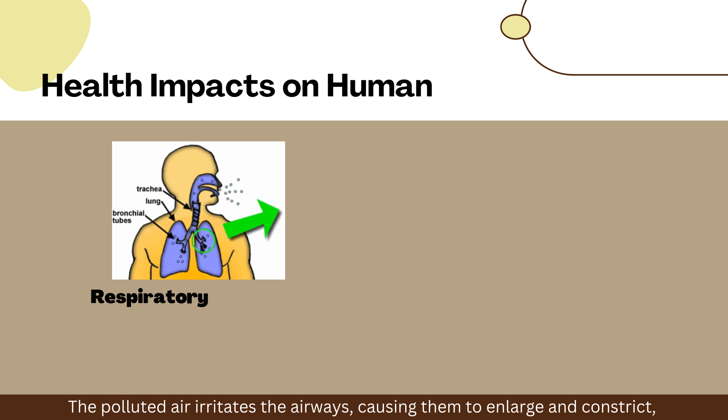However, based on Fadil et al., air pollution from oil and gas production contributes to thousands of early deaths and childhood asthma cases nationwide. The pollutants released and emitted can cause health problems. The polluted air will irritate the airways, causing them to enlarge and constrict, resulting in breathing issues, particularly in children with asthma. Aside from that, contaminated air can cause cancer since it includes a combination of contaminating particles.

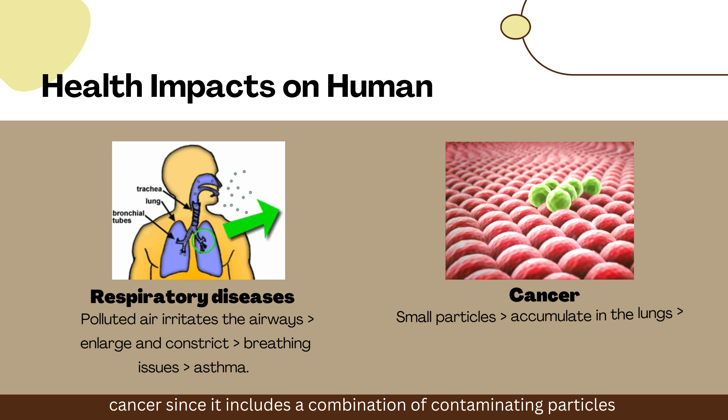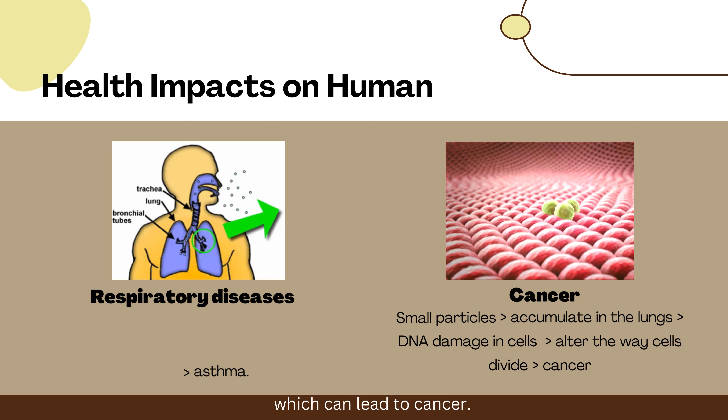There are several ways in which air pollution can induce lung cancer. For example, small particles may accumulate in the lungs and cause DNA damage in cells. This can alter the way cells divide, which can lead to cancer. Photochemical smog, acid rain, greenhouse effect and global warming, ozone layer depletion, and other effects of air pollution emissions into the environment might have long or short-term consequences.

Air pollution can be regulated by relevant laws. Each nation has its own legislation, such as the Environmental Quality Act 1974 in Malaysia, the National Environmental Management Act in South Africa, and the Canadian Environment Protection Act of 1999.

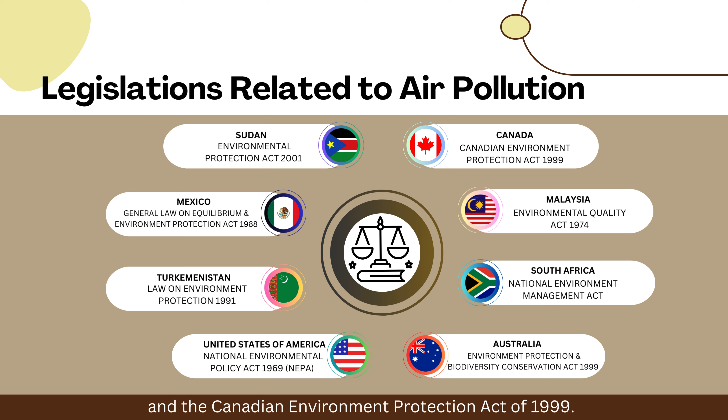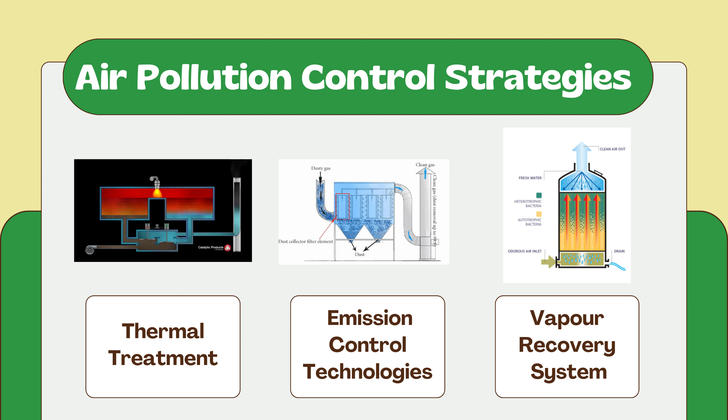The pollution caused by industrial activities is subject to mitigation and control strategies. Nowadays, there are various air pollution control strategies being applied in the oil and gas industries to reduce the risk to air and create more ecologically friendly plants. Thermal treatment, for example, involves the combustion of dangerous substances. The most common pollutants that will be discharged are CO, SOx, NOx, and particulates. Flares, incinerators, and thermal oxidizers are among the technologies that can be employed.

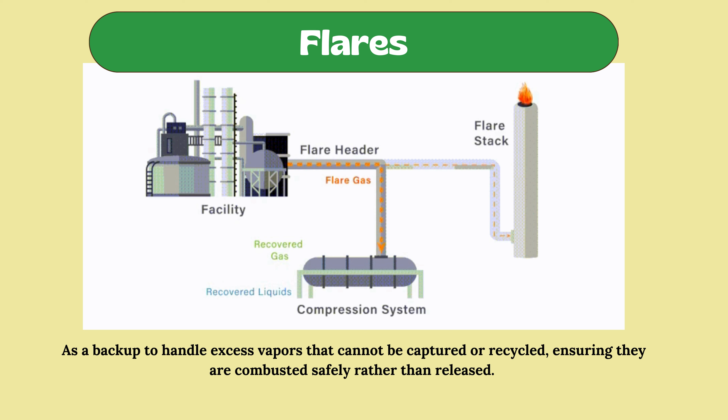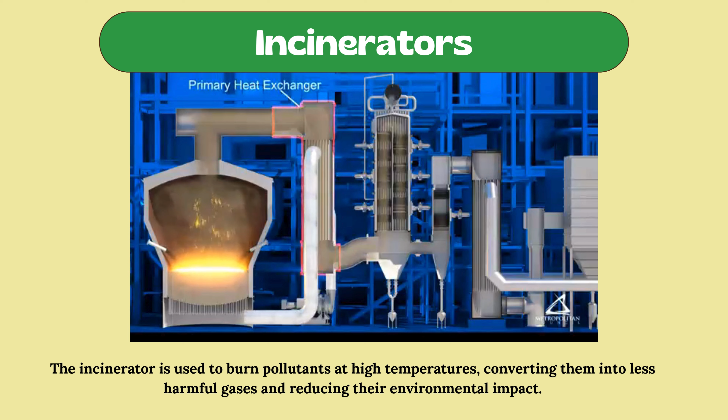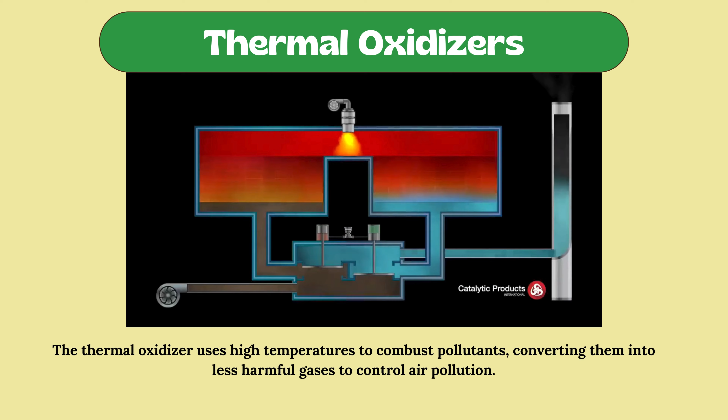Flares act as a backup to handle excess vapors that cannot be captured or recycled, ensuring that they are combusted safely rather than released. Meanwhile, an incinerator is used to burn pollutants at high temperatures, converting them into less harmful gases and reducing their environmental impact. Apart from that, the thermal oxidizer uses high temperatures to combust pollutants, converting them into less harmful gases to control air pollution.

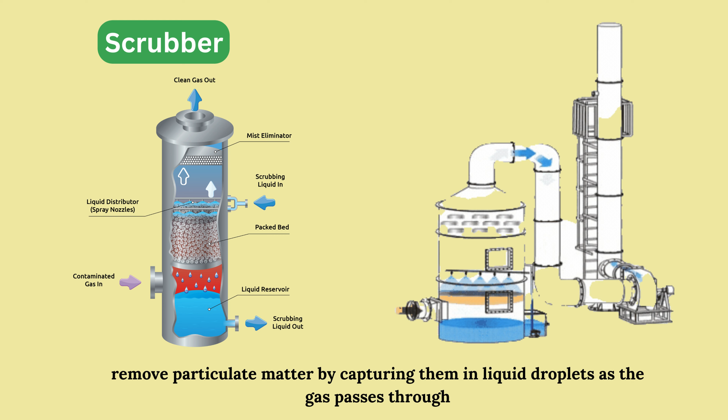Dust or PM removers are used to remove PM from gas streams. The pollutants that will be discharged are particulates and acid gases. Scrubbers, cyclones, bag filters, and electrostatic precipitators (ESP) are all possible technologies. A scrubber is used to remove particulate matter by capturing it in liquid droplets as the gas passes through.

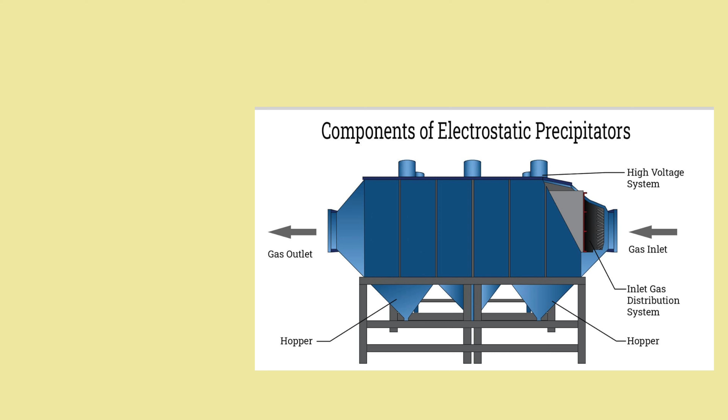Meanwhile, bag filters are made of a filter media that has small pores that can trap particles from the exhaust gas generated. Aside from that, electrostatic precipitators use electrical forces to move particles out of the flowing gas stream onto collector plates.

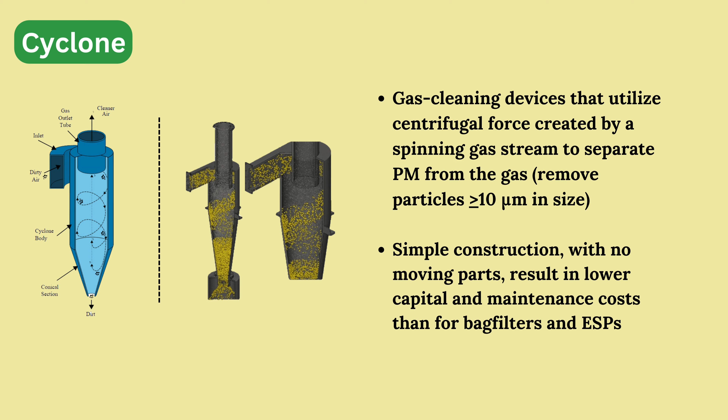The other technology is the cyclone, which is a gas cleaning device that utilizes a centrifugal force created by a spinning gas stream to separate particulate matter from the gas. It is a simple construction with no moving parts, resulting in lower capital and maintenance costs compared to bag filters and ESP.

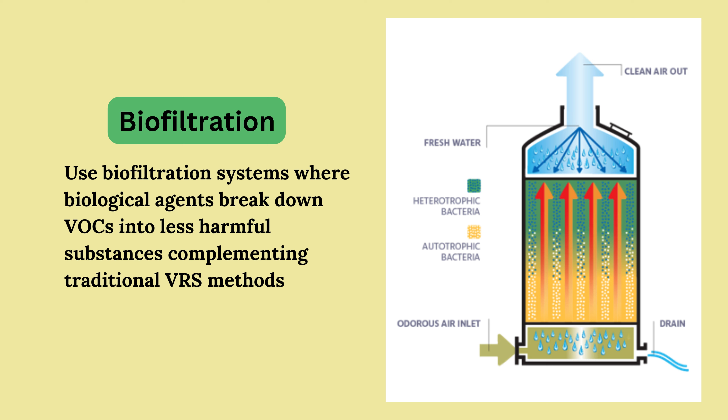The purpose of a vapor recovery system, VRS, is to recover VOCs at the port or terminal as well as at the service station, where VOCs are of primary importance. The last one is biofiltration technology, where biological agents break down volatile organic compounds into less harmful substances, complementing traditional vapor recovery system methods.

All in all, as air pollution issues are contributed by processing plant activities, proper prevention action as well as mitigation measures must be implemented effectively. Employing advancements in technology to combat air pollution issues will ensure more effective control strategies. Technologies can reduce emissions and help mitigate climate change effects. Investing in clean technologies can stimulate economic growth and reduce healthcare costs associated with air pollution-related illnesses.

Cleaner air improves the quality of life for communities by reducing smoke, odors, and particulate matter that can affect daily activities and outdoor enjoyment. By implementing technologies for air pollution control, societies can achieve better health outcomes, protect the environment, and promote sustainable development.